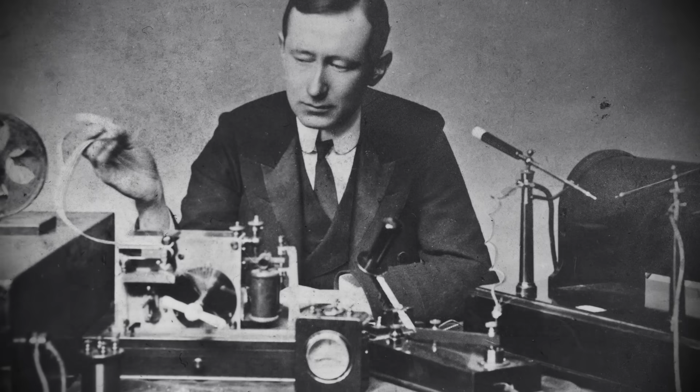In 1888, German physicist Heinrich Hertz, whose name is now the official unit of frequency, succeeded in generating and detecting long, low-frequency electromagnetic waves, confirming Maxwell's predictions. Hertz's discoveries not only inspired later inventors like Guglielmo Marconi to develop wireless communications, aka radio, but also laid the groundwork for the discovery of the rest of the electromagnetic spectrum.

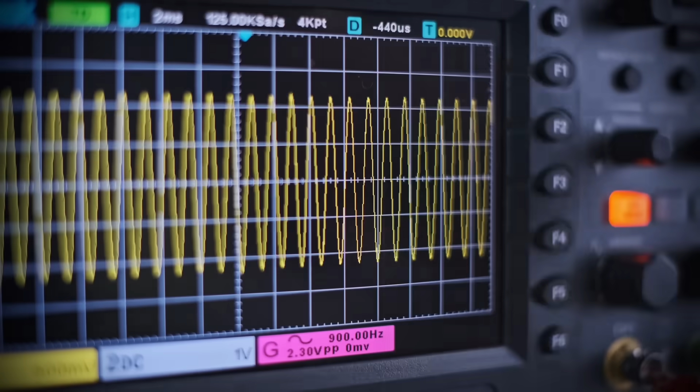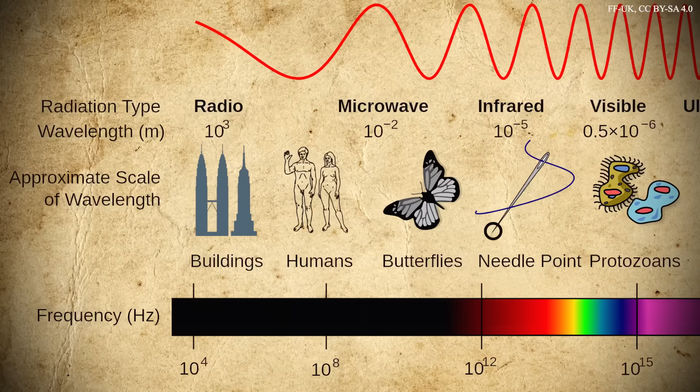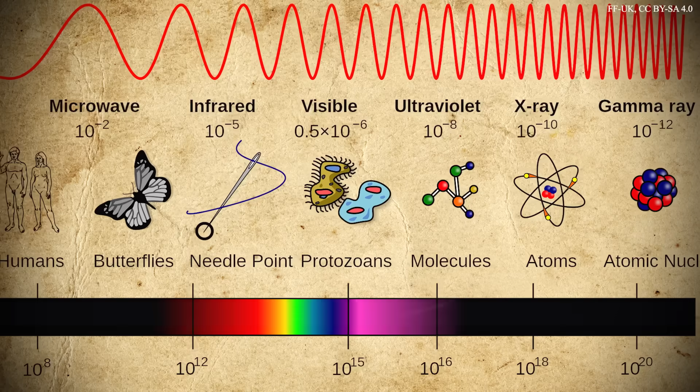In the 1910s and 20s, it was discovered that high-frequency electric currents and shortwave radio signals could induce heating in various materials, including human tissue. This led to the development of diathermy, a method for electromagnetically heating muscles and other deep tissues still widely used in physiotherapy to this day.

The application of this technology to the field of cooking was readily apparent, and at the 1933 Century of Progress exhibition in Chicago, electrical giant Westinghouse demonstrated the rapid cooking of foods like steak and potatoes by placing them between 2 metal plates attached to a 10 kilowatt, 60 megahertz shortwave radio transmitter. But while impressive, the required equipment was bulky, expensive, and dangerous, and the technique failed to take off. The dream of cooking food rapidly without flames would have to await the development of a revolutionary piece of technology whose invention was driven by the needs not of medicine or gastronomy, but of war.

Our story properly begins in 1934, as Europe was once again gearing up for war. The interwar period saw huge leaps in aviation technology, with aircraft going from rickety contraptions of wood, wire, and fabric to sleek, powerful, all-metal machines capable of flying at speeds hundreds of kilometers per hour and altitudes tens of thousands of meters high. So advanced were these new weapons that military planners boasted that the bomber will always get through, and that future wars would be ended swiftly and decisively by destroying the enemy's military and industrial assets from the air.

In the United Kingdom, these developments caused a not insignificant amount of anxiety, as the nation had already gotten a taste of the horrors of aerial bombardment during the First World War. Unfortunately, the Royal Air Force's infrastructure for detecting and tracking incoming enemy bombers had barely evolved over the previous 2 decades, depending largely on the human aircraft spotters of the Royal Observer Corps.

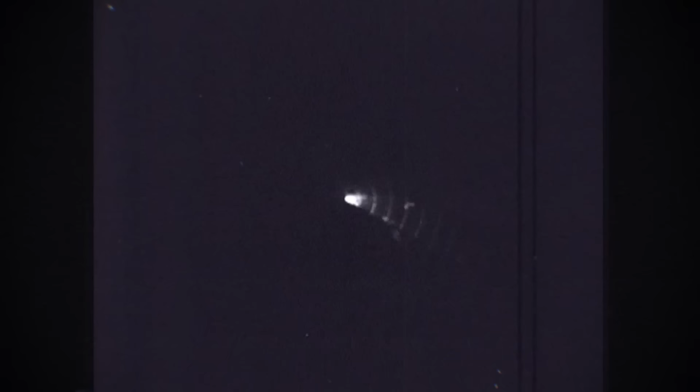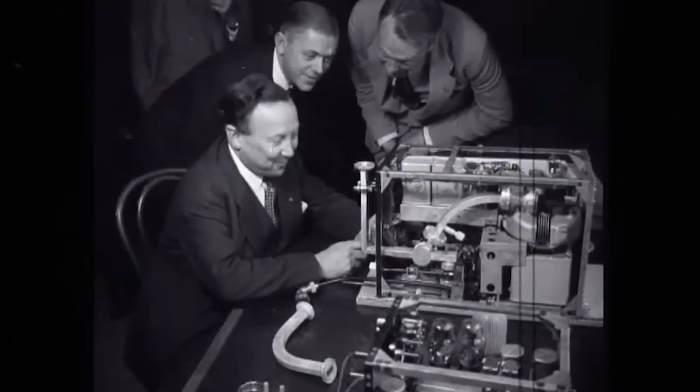But while now widely recognized as the first practical radar set, unfortunately Hülsmeyer's invention failed to attract any military or commercial interest. But in 1933, physicist Rudolf Kühnhold, scientific director of the Kriegsmarine or German Navy, began experimenting with radio devices for detecting and tracking ships at sea. After some initial failed experiments, he joined forces with amateur radio operators Paul-Günther Erbslöh and Hans-Karl Freiherr von Willisen and formed a private company called GEMA.

In June of 1934, the company built a 70-watt transmitter and receiver operating at a frequency of 600 MHz and a wavelength of 50 centimeters, and succeeded in detecting large ships in Kiel Harbor at a distance of 2 kilometers. Unlike Christian Hülsmeyer's device, the range of contacts was determined by pulsing the radio beam and measuring the time it took for each pulse to travel back and forth. The echoes were also displayed visually on a Braun cathode ray tube.

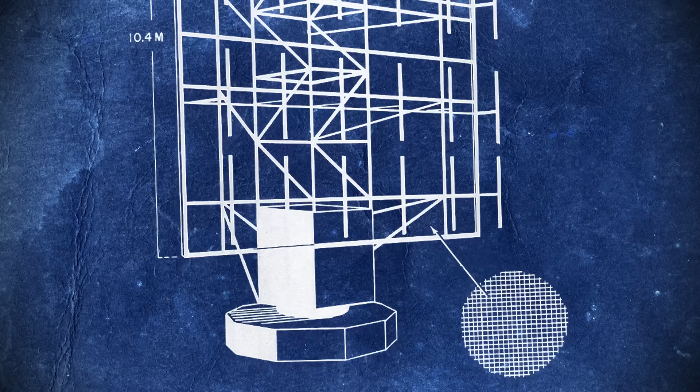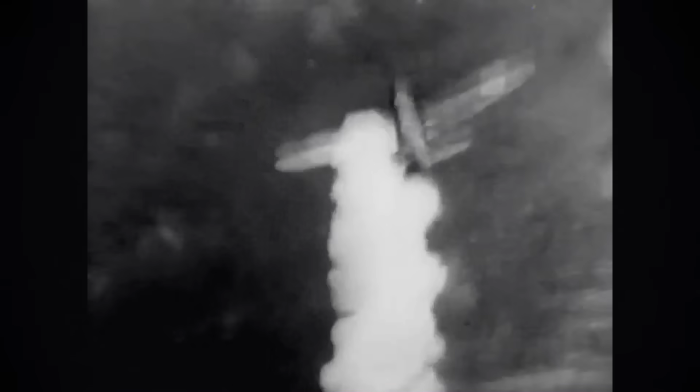In September 1935, GEMA successfully demonstrated their equipment to the Kriegsmarine, who immediately ordered it into production as the Seetakt, the world's first operational shipborne radar. The technology was also later adapted into the Freya early warning radar to defend German territory against enemy bombers. But while the Germans initially led the world in radar technology, development work was ordered halted shortly after the outbreak of the Second World War. This was because German leaders assumed the war would be over in a matter of months. Therefore, advanced technologies like radar and jet propulsion would not be needed.

Meanwhile, in Britain, the development of radar was spurred by the most unlikely of circumstances. In 1934, articles appeared in German newspapers claiming that the German military was developing a death ray that used powerful radio beams to shoot down enemy aircraft. Intrigued and apparently desperate for any military advantage, however far-fetched, Dr. Harry E. Wimperis, the Air Ministry Director of Scientific Research, contacted Dr.

Robert Watson Watt of the National Physical Laboratory Radio Research Station in Slough and asked him if such a death ray were feasible. Watson Watt passed on the task to his colleague Arnold Wilkins, who later recalled, "I received the request on a piece of torn-off calendar. Watson Watt liked using that sort of thing, being an economical Scotsman.

The request, I soon deduced, was to assess the feasibility of a death ray, as he was asking me to calculate the amount of radio energy which must be radiated to raise the temperature of a man's blood to fever heat at a certain distance." End quote. To the disappointment of science fiction fans everywhere, it took Wilkins less than half an hour to calculate that the power requirements of a working death ray were far too high to be practical.

However, in his report, he asked if there was anything else the radio research station could do to help the Air Ministry. He soon remembered reading a post office report from the previous year claiming that an aircraft flying across an experimental VHF radio telephone link had caused the received signal to fade, and wondered whether such a radio beam could be used to detect and track aircraft at long distances.

Discussing the matter with Watson Watt, Wilkins realized that if they used a radio beam with a wavelength of 50 meters, the 25-meter metal tubing wings of the Handley Page Heyford, the RAF standard bomber at the time, would act as a half-wave dipole antenna, reflecting back a much stronger signal than previously assumed.

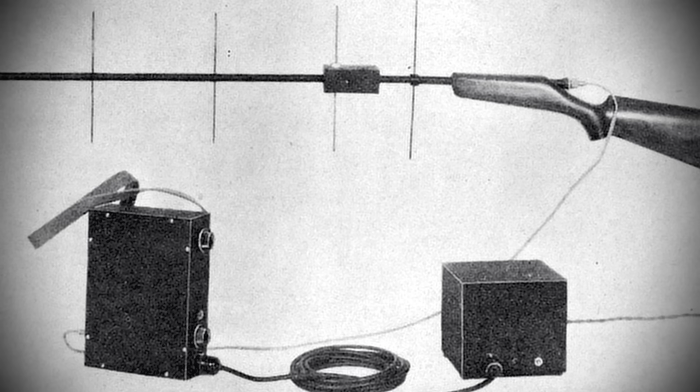Impressed, the Air Ministry requested a live demonstration of his theory scheduled for February 26th. In classic British make-do and mend fashion, Watson Watt was forced to beg, borrow, and steal much of the equipment needed for this demonstration. For the transmitter, he used the BBC's shortwave radio station at Daventry, transmitting at a frequency of 6 MHz and a wavelength of 49 meters. And for the receiver, he borrowed equipment built by the radio research station Sir Edward Appleton to study the Earth's ionosphere and packed it into an ancient Morris commercial van.

He and Wilkins drove the van to a field outside of the town of Weedon near Daventry, where they set up their receiving aerials. The following day, witnessed by Air Ministry observer A.P. Rowe, the pair hunched over a glowing cathode ray tube display in the cramped van, while RAF pilot Flight Lieutenant F.L. Bluck took off and flew his Heyford bomber at 3,000 meters on a predetermined course between Daventry and Weedon. As the bomber lumbered past at 144 kilometers per hour, the team watched as the glowing green dot slowly climbed up the tube, the signal only being lost when the aircraft was 13 kilometers away. According to legend, Watson Watt triumphantly declared, "Britain is once more an island."

With the basic principle of radio detection proven, Watson Watt received £10,000 from the Air Ministry, an enormous sum in those days, to further develop the technology. In May 1935, he and his colleagues set up an experimental establishment on an island at Orford Ness in Suffolk, officially named the Ionospheric Research Station to conceal its true purpose. Progress was incredibly swift. After only a month, the team succeeded in tracking a Westland Wallace aircraft out to a range of 27 kilometers, while just a week later, they accidentally detected a flight of 3 RAF Hawker Hart fighters at a range of 32 kilometers and discovered they could track each aircraft individually.

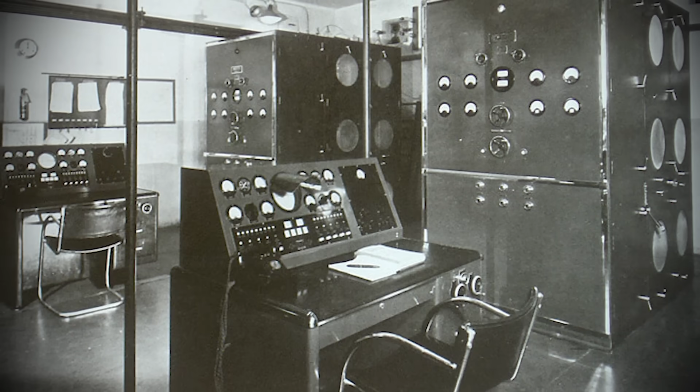At this point, the technology was still known simply as radio detection, but American researchers gave it the name Radio Detection and Ranging, or radar for short. With all the technical details worked out, in early 1936, Watson Watt's team began constructing the first operational radar station at Bawdsey Manor in Suffolk, the transmitting and receiving aerials being mounted on 100-meter tall steel and wooden towers.

Initially used for technical development and training of future radar crews, in May 1937, the Bawdsey Manor installation became the first site of the Chain Home, or CH radar network, designed to defend England's southern and eastern coasts. By the time it became fully operational in the spring of 1939, Chain Home totaled 20 radar sites stretching from the Isle of Wight to the Firth of Forth.

To detect low-flying aircraft, a second parallel network called Chain Home Low, based on gun-laying radar sets operating at a wavelength of 1.5 meters, was also installed. Along with the Royal Observer Corps, Chain Home formed the early warning component of the so-called Dowding system, named after Air Chief Marshal Hugh Dowding, commander of RAF Fighter Command.

The coordinates and heading of enemy bomber formations were transmitted from Chain Home and ROC stations to a filter room at Fighter Command headquarters at Bentley Priory in London, where ground controllers, many of them members of the Women's Auxiliary Air Force, or WAAFs, plotted this information on a giant map and guided the appropriate fighter units to make the interception. By providing early warning and directing aircraft to specific targets, the Dowding system allowed Britain's limited fighter force to be deployed with maximum efficiency and effectiveness.

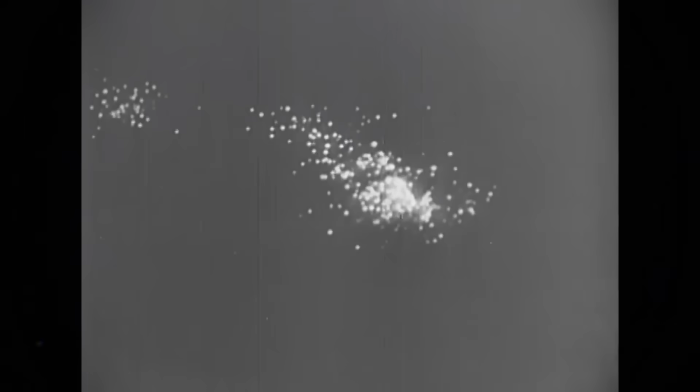However, when the Germans switched to night bombing, this became all but impossible, and for the first few months of the Blitz, Britain's air defences proved all but useless against the nocturnal intruders. Solving this problem would lead to one of the greatest technological breakthroughs of the entire war.

Meanwhile, the RAF's Bomber Command turned the tables on the Germans and began flying regular bombing raids on Germany and occupied Europe. But just like the Germans, the British quickly discovered that bombing in daylight was suicide, and atrocious losses at the hands of the Luftwaffe fighters forced them to switch to night bombing.

However, this created problems of its own, as navigating to a target and dropping bombs accurately in pitch darkness proved all but impossible. Indeed, in the early days of the bombing campaign, it was determined that over 90% of bombs fell on open countryside several kilometers from the intended target.

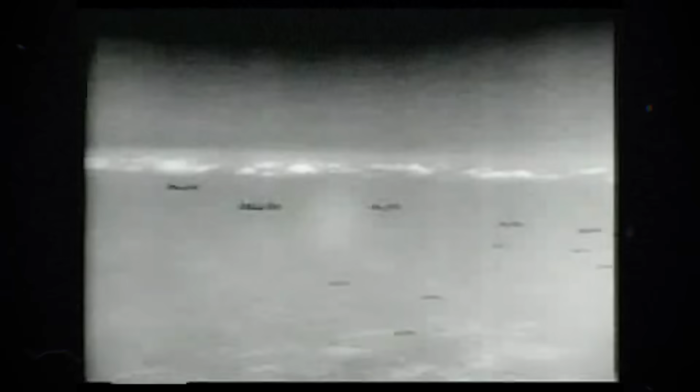Even worse, by this time, the Germans had recognized the utility of radar and developed their own, even more sophisticated version of the Dowding system, known as the Himmelbett, or four-poster bed, or the Kammhuber line, after Generalmajor Josef Kammhuber. Early warning of incoming enemy bombers was given by a chain of coastal radars codenamed Freya, after the Queen of the Gods in Germanic mythology, operating at a wavelength of 1.2 meters.

Once the bombers had passed the coast, they were handed over to a network of smaller radars codenamed Würzburg, operating at a wavelength of 50 centimeters, which could accurately track individual bombers and direct searchlights, anti-aircraft guns, and night fighters toward them. As in the Dowding system, all of this was coordinated from central command rooms largely staffed by female auxiliaries known as the Luftwaffenhelferin.

At first, German night fighters, like their British counterparts, had to make the actual interceptions visually, but from 1942 onwards, they were increasingly equipped with the 61-centimeter FuG 202 Lichtenstein airborne intercept radar, whose distinctive branching aerials mounted to the aircraft's nose were nicknamed mattress or stag's horns.

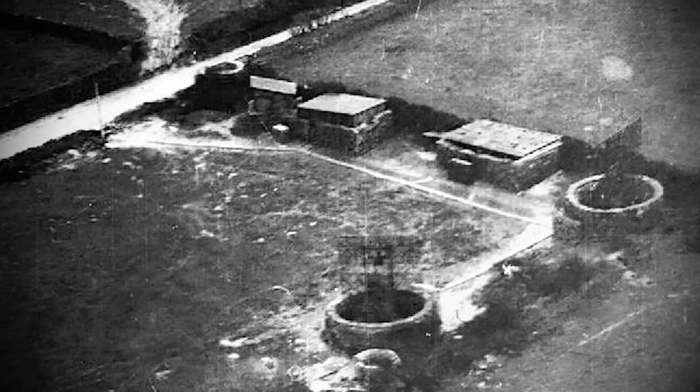The technical details of the Kammhuber line, which inflicted unsustainable losses in the early days of the night bombing campaign, were soon worked out by British intelligence by various methods, including signals intelligence, aerial reconnaissance photographs, the breaking of the German Enigma cipher, and even a daring raid on February 27, 1942, codenamed Operation Biting, in which a team of British airborne troops parachuted into a Würzburg site in Bruneval in France to capture pieces of the radar and some of its operators, but that's a story for another video.

Once the British knew how the system and its various components worked, they very quickly set about developing countermeasures. The first of these was simply to form the bomber force into a single concentrated stream and fly them through a single point in the Kammhuber line, swamping the Würzburg radars and preventing night fighters from being accurately guided towards individual targets. However, the Germans quickly countered this tactic by deepening the line to include multiple overlapping defensive sectors and placing large radar-controlled anti-aircraft batteries around major industrial targets like factories.

Undeterred, the British turned to a series of increasingly sophisticated electronic countermeasures. The first of these, codenamed Tinsel, Jostle, and Airborne Cigar, jammed night fighters' radios by broadcasting white noise generated by microphones placed in the attacking bombers' engines, preventing ground controllers from guiding them to an intercept. Later, when night fighters began being equipped with Lichtenstein airborne radar, another jamming device, codenamed Piperack, was developed to counter it. Mandrel was used to jam the Freya early warning radars.

Moonshine was a transponder which made a single decoy aircraft appear on radar like an enemy flight of bombers, luring German air defenses away from the main force, while Perfectos triggered the night fighters' identification, friend or foe, or IFF transponders, revealing their positions. Rather more devious and amusing was Operation Corona, in which German-speaking radio operators aboard the bombers impersonated the German ground controllers, causing mass confusion among the night fighter force.

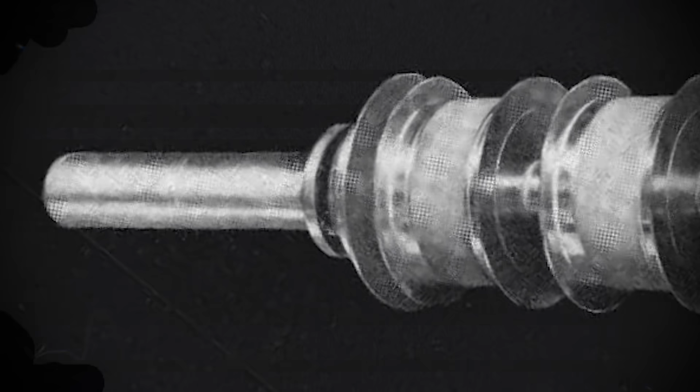Used in many early radar sets, the klystron was a type of amplifying vacuum tube that bounced a beam of electrons between two resonant cavities, creating an oscillation that generated high-frequency radio waves. Unfortunately, klystrons could only generate practical radar beams at wavelengths down to 50 centimeters. At shorter wavelengths, the power requirements became impractically high. Randall and Boot thus abandoned the klystron and focused on another device known as the split anode magnetron.

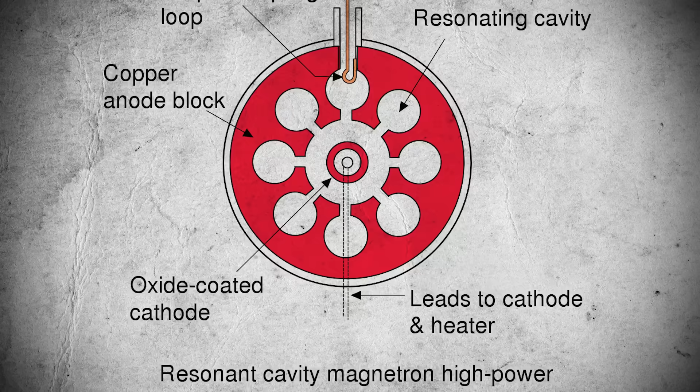In November 1939, the pair sketched out an unusual device they dubbed the cavity magnetron. This consisted of a solid cylindrical anode made of copper with a central cavity and 6 smaller resonant cavities arranged around it and connected by slots. A cathode injected electrons into the central cavity, while a powerful magnet caused the electron beam to swirl around its edge past the openings to the peripheral cavities, creating a resonance in a similar manner to blowing air across the mouth of a bottle and hopefully generating wavelengths of 10 centimeters or less.

When Randall and Boot presented their concept to Oliphant, he was not overly enthusiastic, but given the discouraging lack of success with other approaches, he tacitly approved their experiments. With resources almost non-existent, Randall and Boot were forced to resort to the string and sealing wax approach that had characterized British physics for over 100 years. High-voltage transformers were scrounged from the Royal Navy base at Portsmouth, while an old teaching electromagnet was unearthed in one of the university labs. Other components like the copper anode and high-voltage rectifiers, Randall and Boot manufactured themselves.

Emblematic of the make, do, and mend nature of the endeavor, the ends of the prototype were vacuum sealed using 2 halfpenny coins and sealing wax. The methods used to test the exotic new device were equally crude. To measure its power output, Randall and Boot connected the magnetron to a series of light bulbs, increasing the power until the bulb burned out before swapping in a new one. By this method, they measured the maximum output to a whopping 400 watts.

To measure the emitted wavelengths, they used an apparatus known as a Lecher line, a pair of parallel wires attached to the magnetron along which a light bulb could be slid, the bulb lighting up at each half wavelength. To the pair's astonishment, their first prototype produced a wavelength of 9.87 centimeters, almost exactly what they were aiming for. News of the breakthrough at the University of Birmingham spread like wildfire through the British military establishment, who immediately ordered that top priority be given to its refinement and deployment.

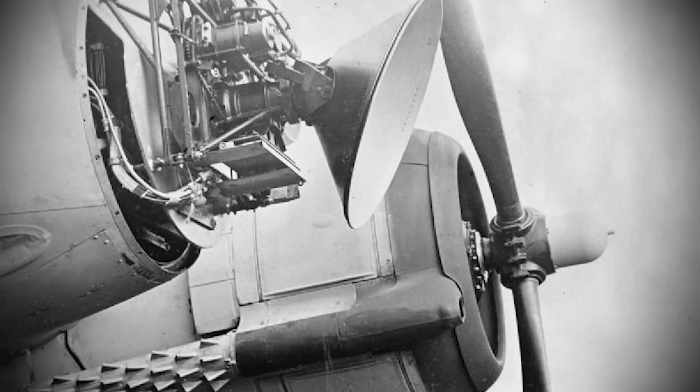In late 1941, British Bristol Beaufighter night fighter aircraft began being equipped with the Airborne Intercept or AI Mark 7 radar, which produced a narrow 25 kilowatt beam with a wavelength of 9.1 centimeters that could accurately pinpoint enemy aircraft in pitch darkness at a range of between 120 meters and 10 kilometers. Previous Airborne Intercept radars operating at wavelengths of 1.5 meters were plagued by random echoes from the ground below, limiting their effective range to around 5 kilometers. This technology allowed the Royal Air Force to finally sweep the Luftwaffe from British skies, bringing the dreaded Blitz to an end.

Meanwhile, centimetric radars fitted in Royal Navy and RAF Coastal Command aircraft like the Vickers Wellington, Consolidated B-24 Liberator, and Consolidated PBY Catalina allowed them to detect even the periscopes of submerged German U-boats. Previously, these aircraft were fitted with the less sophisticated Air-to-Surface Vessel or ASV Mark II radar, operating at a wavelength of 1.25 meters. While these sets allowed aircraft to detect a surfaced U-boat at a range of 100 kilometers, the Germans soon developed a detector called METOX that allowed them to crash dive and escape before an attacking aircraft came into firing range. With the introduction of the magnetron-based ASV Mark III, however, the U-boats had nowhere to hide and were forced to spend more and more time submerged, greatly reducing their effectiveness.

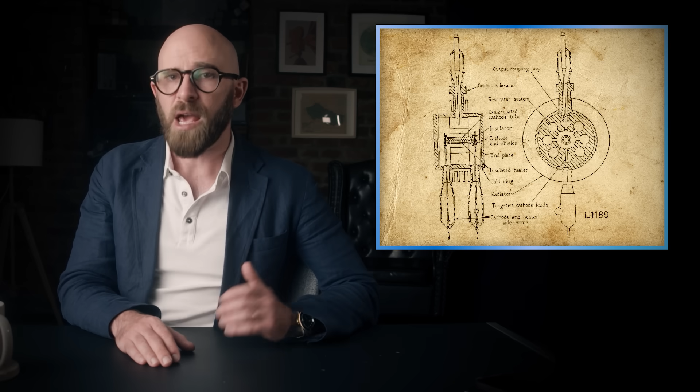More than any other breakthrough, the cavity magnetron helped turn the tide of the Battle of the Atlantic, the longest fought of the entire war, and the only one which Winston Churchill admitted truly frightened him. The magnetron also played a major role in Allied strategic bombing against Germany and occupied Europe. As previously mentioned, when the British switched from daylight to night bombing early in the war, they discovered that accurately reaching and bombing specific targets using traditional methods like celestial navigation and dead reckoning was all but impossible. RAF Bomber Command thus switched from precision bombing of industrial and military targets like factories and airfields to a strategy of area bombing with incendiaries against large population centers.

They also copied the Pathfinder strategy pioneered by the Luftwaffe during the Blitz, wherein an elite group of aircraft with highly skilled navigators flew ahead of the main bomber force to mark the target with flares and incendiary bombs. To further increase their accuracy, the Pathfinders soon adopted a variety of electronic navigation aids, another technique copied from the Germans. The first of these, codenamed GEE, was introduced operationally in 1942 and consisted of 3 transmitting stations designated A, B, and C, spaced around 160 kilometers apart.

These stations transmitted synchronized pulses such that, depending on his position, an aircraft navigator would receive the pulses from one of the stations ahead of the others. If all the points where all 3 signals were received simultaneously were plotted, they formed long hyperbolic curves known as isochrones, similar to the isobar pressure lines on a weather map. These curves intersected with each other at certain points, forming a huge grid projected across the European continent, hence the codename Gee for grid. Against this grid, aircraft could fix their position.

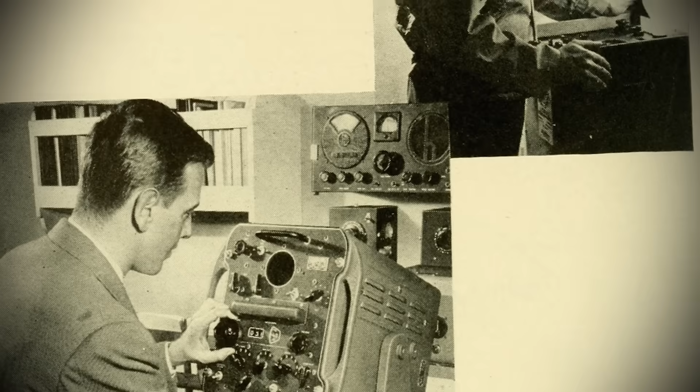The great advantage of Gee was that it was entirely passive, the receiving aircraft emitting no signals which could give away its position, and could be used by any number of aircraft at once. Also, unlike German beam systems, it gave no indication as to the target of a particular raid. Gee inspired the creation of a similar American system known as LORAN, or Long Range Navigation, which remained in use until the 1980s as a general maritime navigation aid for personal and commercial vessels.

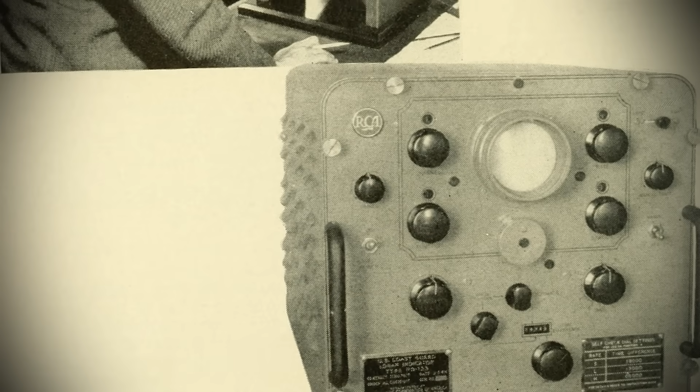However, while Gee could get a bomber to a particular city, it was not accurate enough to guide it over a specific target like a factory, and had a maximum range of 250 kilometers, too short to reach the heart of Germany. Consequently, in early 1943, the British developed a more sophisticated system codenamed Oboe. Unlike Gee, Oboe was an active system incorporating a special transceiver aboard the aircraft which received and returned signals from a pair of transmitting stations in Britain.

The first, dubbed CAT, kept the bomber flying along a circular course intersecting with the target. If the pilot drifted off this course, he heard a string of Morse code dots or dashes in his headphones, as in the ubiquitous Lorenz blind landing system, prompting him to correct left or right. Meanwhile, the second station, codenamed Mouse, kept track of the bomber's position and sent a signal when it was over the target, automatically triggering the release of the bombs.

The accuracy of Oboe was around 100 meters at 400 kilometers, enough to hit a factory in Germany's industrial Ruhr area. However, it could not reach as far as Berlin, and being an active system, gave off signals that German night fighters could home in on.

The British thus set about developing a self-contained navigation system whose reach would only be limited by the range of the aircraft carrying it. This system took the form of H2S, a modified version of the airborne intercept radar pointed downwards, allowing ground features like coastlines, rivers and canals, and towns to be identified in pitch darkness or through thick cloud. This was accomplished using a rotating parabolic antenna housed in a streamlined radome and a circular plan position indicator with a persistent phosphor that refreshed itself with every rotation of the cursor, the classic image of a radar screen that we're all familiar with today.

The system was originally named BN for blind navigation, but it was soon renamed H2S, the chemical formula of the pungent gas hydrogen sulfide, allegedly after a comment made by Professor Frederick Lindemann, scientific advisor to Winston Churchill, quoting him here: "It was stinking because it ought to have been done years before."

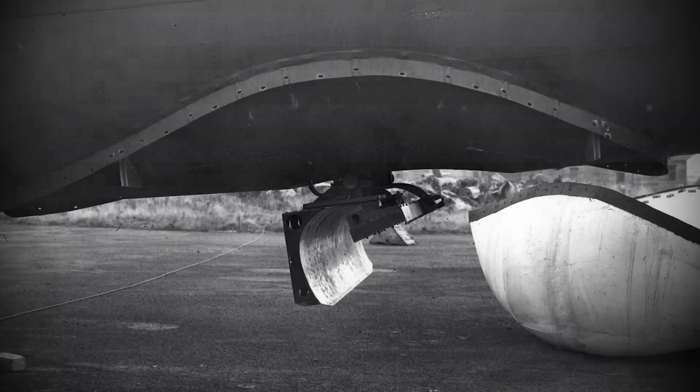Interestingly, the RAF was initially hesitant to deploy H2S since it was feared that the Germans would capture and copy the top-secret magnetron technology. Indeed, experiments had proven that the copper anode at the heart of the magnetron was virtually indestructible and would likely survive even the most violent crash or self-destruct charge largely intact. Technicians were thus assigned to develop an alternate version using the well-known klystron tubes, but this proved technically infeasible.

In the end, the strategic benefits of deploying H2S were deemed to outweigh the risks, and the system was first deployed on a mission in January 1943, when Short Stirling and Handley Page Halifax bombers of 7 and 35 squadrons successfully located and marked the city of Hamburg in extremely bad weather. H2S played a vital role in the latter stages of the Allied bombing campaign in Europe, while a similar blind bombing radar called the AN/APQ-13 was used by American Boeing B-29 Superfortress bombers against targets in Japan.

As predicted, the Germans did manage to capture and copy magnetrons from downed Allied aircraft and produce their own centimetric airborne intercept radar, codenamed Berlin, but these did not see service before the war ended. One of the Allies' greatest secret weapons, the cavity magnetron made an outsized contribution to the war effort, likely shortening the conflict by several years. This is particularly impressive given that Randall and Boot's original prototype, including the halfpenny pieces used to seal the ends, is estimated to have cost only £200, a bargain by any measure.

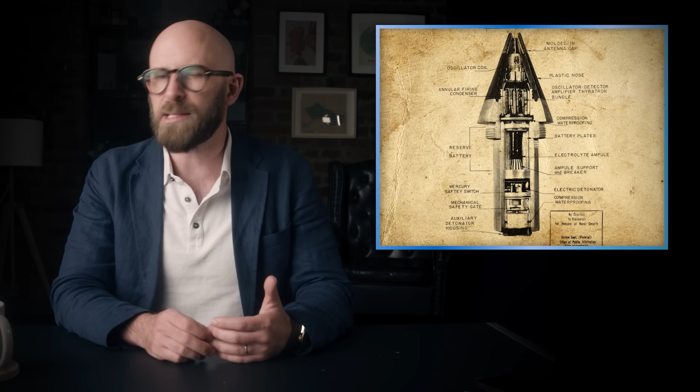Other radar technology played a similarly key role in the conflict. For example, tiny radar sets, known as proximity fuses, were placed inside anti-aircraft artillery shells, allowing them to explode when they passed close to a target.

Such fuses were vital in allowing the US Navy to fend off Japanese kamikaze suicide attacks and the British to defeat the German V-1 flying bomb or Doodlebug.

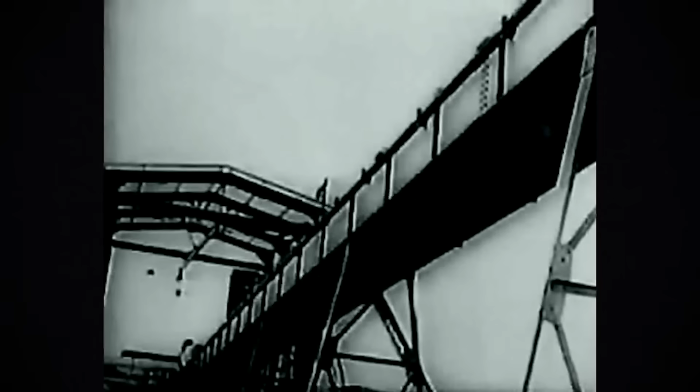And radar altimeters based on tail warning radar sets were used to detonate the 2 atomic bombs dropped on Hiroshima and Nagasaki, helping to deliver the killing blows that finally brought the war to an end.

Now, by this point, you're probably thinking, what does this have to do with microwave ovens? Well, as you'll recall from the very beginning of the video, microwaves are defined as electromagnetic radiation with a wavelength between 1 meter and 1 millimeter, exactly the kind of radiation generated by a cavity magnetron. But while experiments with cooking food using shortwave radiation had been conducted before the war, it took a happy and hilarious accident for the wartime sword of radar to be beaten into the peacetime plowshare of everyone's favorite kitchen appliance.

In 1945, Percy Spencer, an engineer at the Raytheon Company in Cambridge, Massachusetts, was working on the magnetron of an active radar set when he reached into his pocket for a snack. To his surprise, he discovered that his Mr. Goodbar chocolate bar had somehow melted into a sticky mess. This effect had been observed by several other technicians, but Spencer was determined to know more. He thus embarked on a series of legendary experiments, as recounted in a 1958 Reader's Digest article.

He sent a boy out for a package of popcorn. When he held it near a magnetron, popcorn exploded all over the lab. The next morning, he brought in a kettle, cut a hole in the side, and put an uncooked egg in its shell into the pot. Then he moved a magnetron against the hole and turned on the juice. A skeptical engineer peeked over the top of the pot just in time to catch a faceful of cooked egg. The reason? The yolk cooked faster than the outside, causing the egg to burst.

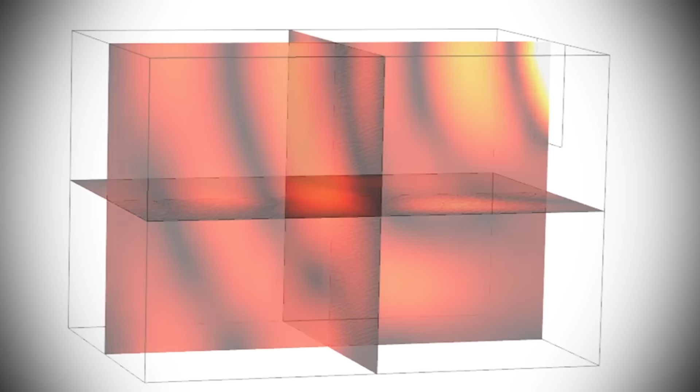These experiments confirmed that it was indeed the microwaves emitted by the magnetron, and not something else like radiated heat, that was heating up the food. Today we know that microwave ovens work because the constantly changing electromagnetic field causes molecules like water and fat with a strong dipole structure, that is, one negatively and one positively charged end, to rotate rapidly, generating heat that is transferred to the rest of the food. This is why dry, low-fat foods like crackers don't heat up when placed in a microwave.

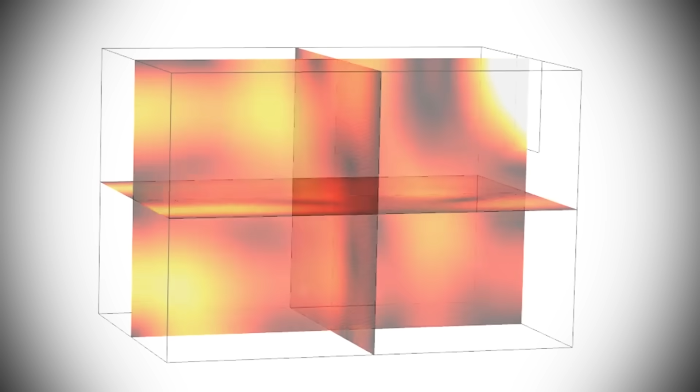Contrary to popular belief, however, microwaves don't cook food from the inside out. Rather, this effect occurs when there is a greater concentration of absorbent moisture inside the food than on its surface, such as in the classic Hot Pocket with its tongue-searing molten lava filling. Also, microwaves emerging from the magnetron bounce around randomly inside the oven and interfere with themselves, producing zones of varying power density that can cook different regions of a food item at different rates. However, this effect is usually countered through the use of a turntable to slowly rotate the food, or a motorized waveguide to more evenly distribute the microwaves around the interior of the oven.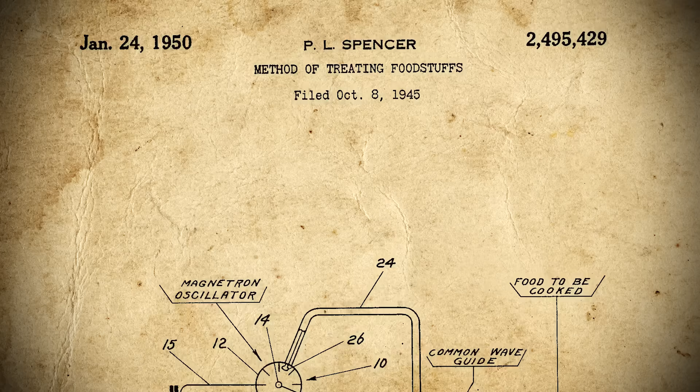While Spencer's supposedly serendipitous discovery has become the stuff of legend, in reality, the development of the microwave oven was a gradual process involving dozens of small discoveries and developments by multiple technicians. Nonetheless, on October 8, 1945, Spencer filed US patent 2,495,429 for a method of treating foodstuffs, in which he outlined basic technical details such as the optimal frequency, 2.45 gigahertz, power, and cavity size for effective cooking. Alarmingly, the oven design in his patent featured a conveyor belt for moving food past the magnetron and open ends which allowed face-melting microwave radiation to leak out of the appliance.

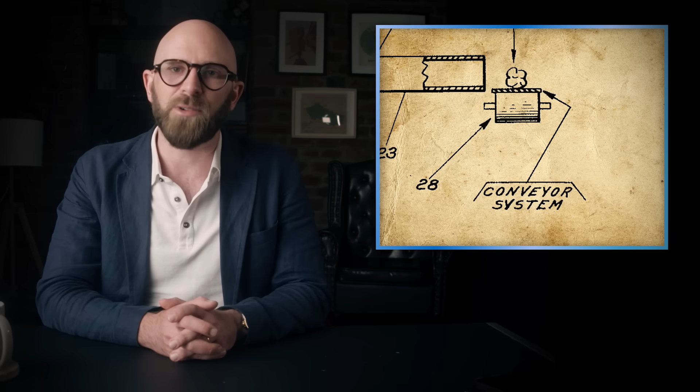In a follow-up patent filed in 1949, Spencer described the now ubiquitous process of microwaving popcorn, while in a 1951 patent, he described how to broil a lobster in a microwave by shoving a pencil-like rod up its behind to prevent the tail from curling and becoming harder to cook, as if lobsters didn't have it hard enough already.

Based on the work of Spencer and others, in particular engineers Lawrence Marshall, Fritz Gross, and Marvin Bock, in 1947, Raytheon produced the first prototype microwave oven, the first of which was installed in a Boston restaurant for testing. Another prototype was incorporated into a delightfully named Speedy Weenie vending machine in New York's Grand Central Terminal, which dispensed freshly microwaved hot dogs. Later that year, Raytheon finally launched the world's first production commercial model under the brand name Radarange. But while today we think of microwave ovens as compact, convenient countertop appliances, the first Radaranges were absolute behemoths, standing at 1.8 meters tall and weighing 340 kilograms.

They consumed 3 kilowatts, 3 times as much as a modern microwave, and produced so much waste heat that they had to be water-cooled. With an eye-watering price tag of $5,000, that's $68,000 in today's money, these units were far out of reach of the average consumer and were instead intended for use in restaurants, cafeterias, airliners, and ships' galleys, with one example being installed aboard the revolutionary nuclear-powered cargo ship and passenger liner NS Savannah in 1961.

In 1955, Raytheon licensed its microwave technology to appliance manufacturer Tappan, who introduced the first microwave oven designed for consumer use, the RL1. Designed to be mounted to the wall like a conventional oven, the RL1 still cost a whopping $1,295 or $11,000 in today's money, resulting in disappointing sales.

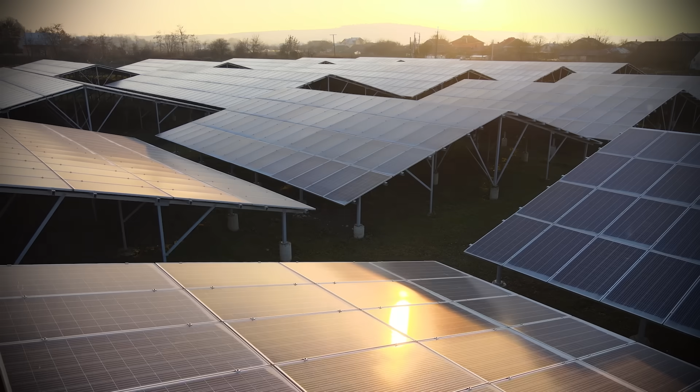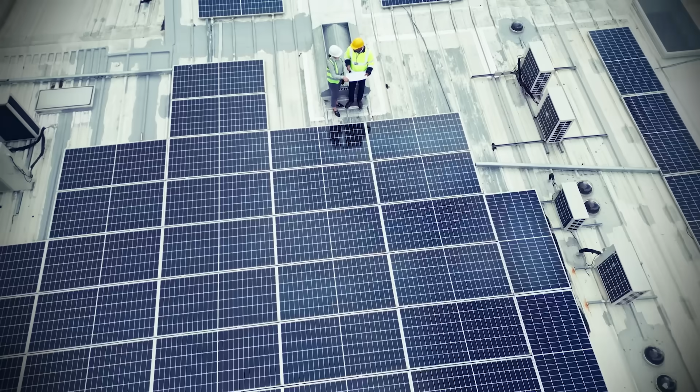For example, in 2023, researchers at Australia's Macquarie University developed a method for using microwaves to selectively decompose the silicon in expired solar panels, allowing the other component materials like glass, plastic, and metal to be safely recycled. In the traditional recycling method, solar panels are crushed, heated to 1400 degrees Celsius, and treated with harsh solvents to dissolve away the plastic components, an energy-intensive and environmentally unfriendly process.

Similarly, in 2022, researchers at Mitsui Chemicals in Japan announced a method for using microwaves to decompose polyurethane foam into its component chemicals without the use of toxic solvents. Meanwhile, a team at the Korea Electrotechnology Institute, or KERI, led by Dr. Sun-Shin Jung, has developed a device designed to bombard agricultural fields with microwave radiation, selectively killing pests hidden under the soil without the need for pesticides.

Even more exotic, engineers at Penn State University have devised a microwave-based method that could eventually be transported to the moon and used to smelt minerals found in the lunar dust or regolith, either to extract valuable metals like titanium or build permanent structures on the lunar surface. In the grand tradition of cheeky tech acronyms, the team dubbed their creation Smelting with Microwave Energy for Lunar Technology System for In Situ Resource Processing, or SMELT.

From defeating the Nazis and Imperial Japan to making dinner time a bit more convenient to smelting metals on the moon, the cavity magnetron has come a long way and stands as one of the greatest stories of swords into plowshares in modern history. Now, if you'll excuse me, I think I'm going to microwave a burrito.